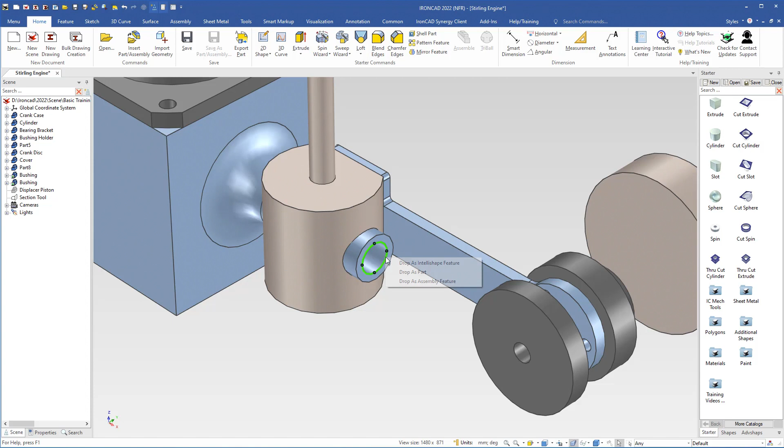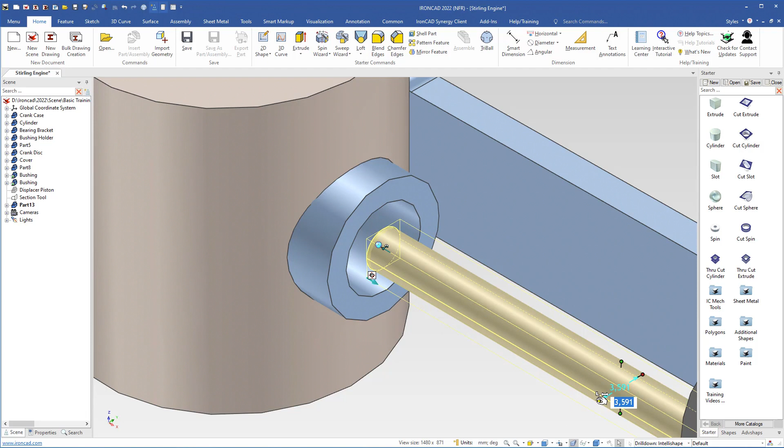But if you don't see the center point, you can move the cursor to the edge, press and hold the Shift key to snap to the edge, and here you let go the right mouse button and you will drop it as a part, and the cylinder will be placed in the center of the hole. But this cylinder is rather large, so I have to change the diameter of it. So I go to the IntelliShape level and I have to change the diameter a lot so that the diameter will be smaller than the hole. I will also change the length a little bit so it will be easier to handle.

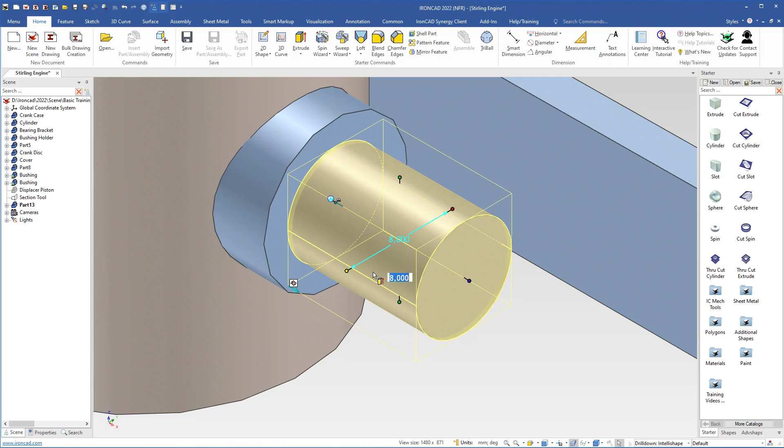So now I will grab this handle and I will move the cursor to this edge, and here I press and hold the Shift key to snap to this edge. And here I let go the left mouse button and then the Shift key. So now I have the right diameter of 8 millimeters. So now I have to change the length a little bit, so I will grab this handle and drag and I will drop it there and type 30 and hit enter.

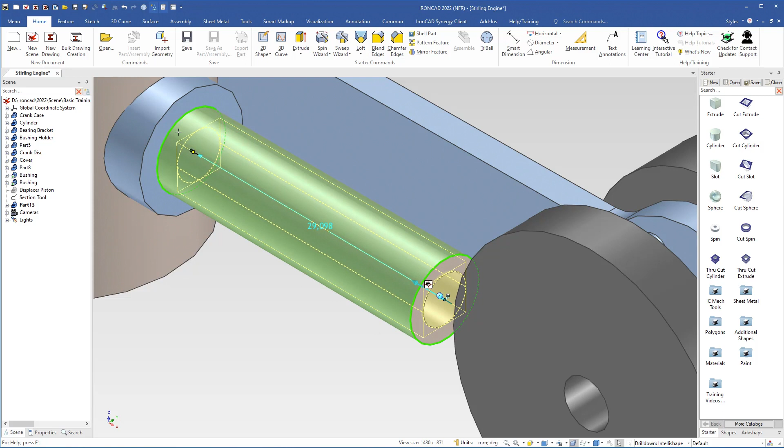Next we will cut a hole through the bushing, so I will use a cut cylinder to do that. Grab a cut cylinder, drop it here in the center and change the diameter to 5, and it should go right through. So I will grab this handle, press the Shift key, hold the Shift key and snap to this edge, and it will go through the bushing.

Then we will place the bushing inside the pipe, so I will select the bushing in IntelliShape level, and here I will right click and choose Flip Extrude Direction, and it will be placed here in the pipe. So then I will select it in part level and go to Properties, and we will change the name here to Piston Rod Bushing. Hit enter, copy the name and paste it in description, and the part number will be 122 and hit enter.

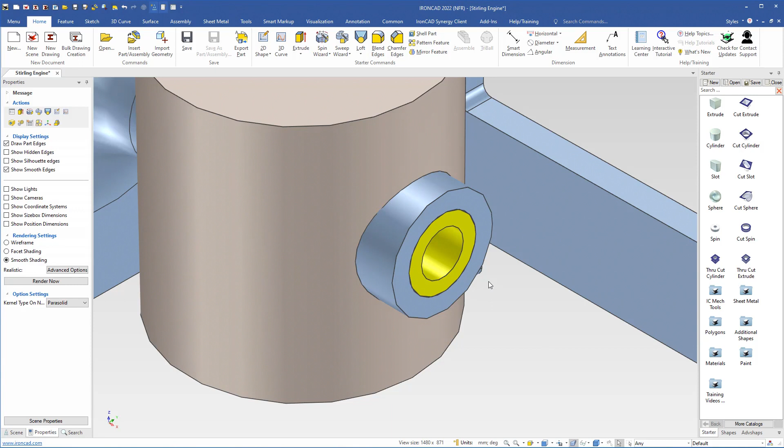Then we come down here to select another color and we will paint it with this yellow color. Then we will bring back the displacer piston, so we use Shift Space to show all. Next step is to make a connecting rod bracket that will be attached to this piston rod. But before we make the bracket, we have to extend the length of this piston rod, so I will select it in IntelliShape level, grab the handle, press the Control key and hold it and snap to 78 millimeters.

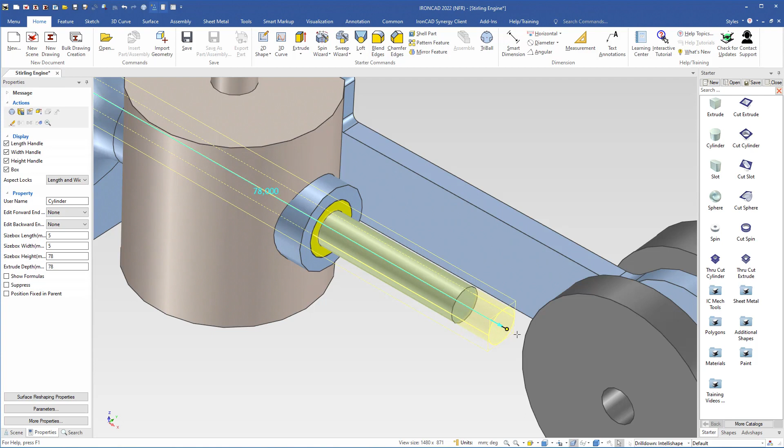Then we will right drag a cylinder and drop it here on the center point, drop it as a part, click OK, and we change the diameter to 12 millimeters. Type 12 and hit enter, and the thickness will be 7 millimeters. Now when we have it in IntelliShape level, we right click and choose Flip Extrude Direction, so it will be in the right location on the piston rod.

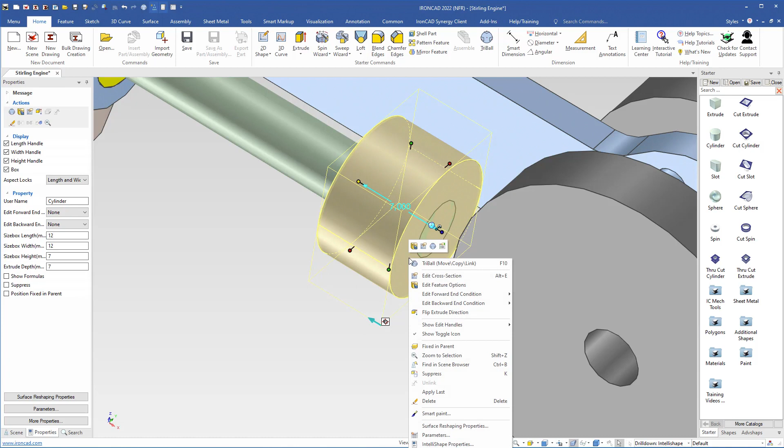And then we have to cut a hole through this bracket, and there are a couple of ways to do it. You can use a cut cylinder to cut a hole, or you can right click this IntelliShape and go to Edit Cross Section. Then you come up here to select the Project command and click on this highlighted face. So now you copy the edges to the grid, and then you can come up here to click Finish and you have cut a hole.

Then we have to remove material from this side so that we eventually can mount a connecting rod to this crank disc. And we will use a cut extrude to remove material. So I will drop the cut extrude here, and I grab this handle, use the Shift key to snap to this node, and I will grab this handle to snap to this node, and I will grab this handle to snap to that node. Let's see now, like so.

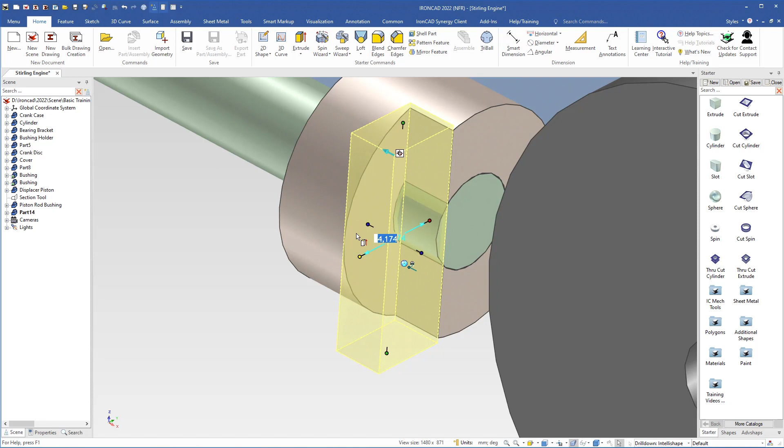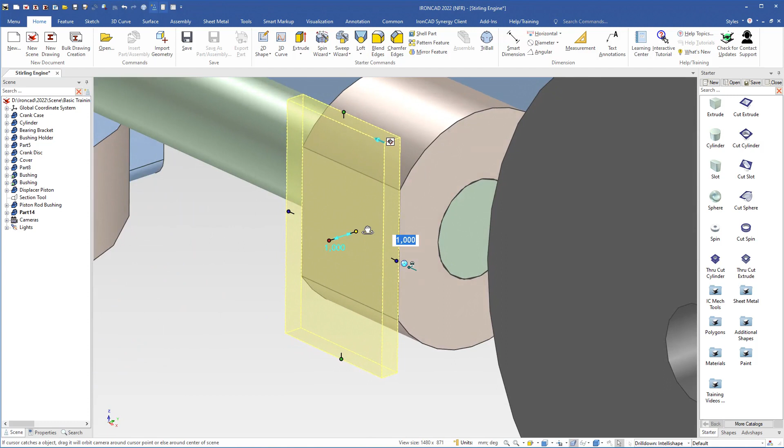And this cut extrude should go right through the bracket, so I will grab this handle, use the Shift key to snap to that edge. Then I'll right click this handle and choose Edit Distance from Center Point of this edge, and it will be 1 millimeter. So that will be enough material to remove to mount a connecting rod.

So now I will select the bracket in part level, go to Properties. Here I will change the name to Connecting Rod Bracket. And hit enter. I copy the name, paste it here in description, and the part number will be 124 and hit enter. And I will paint it with this gray color.

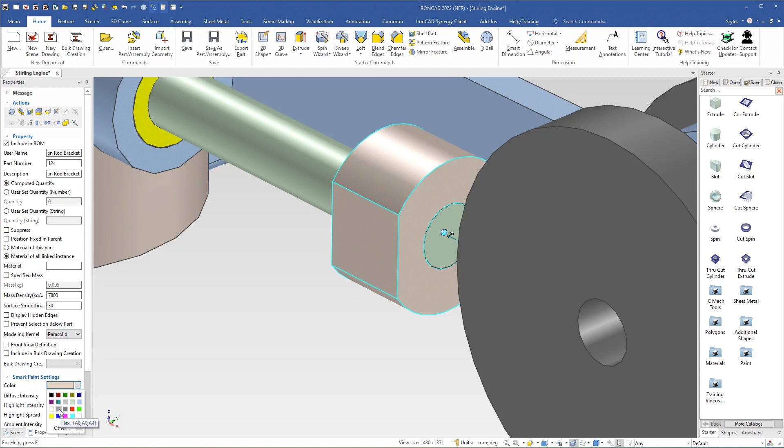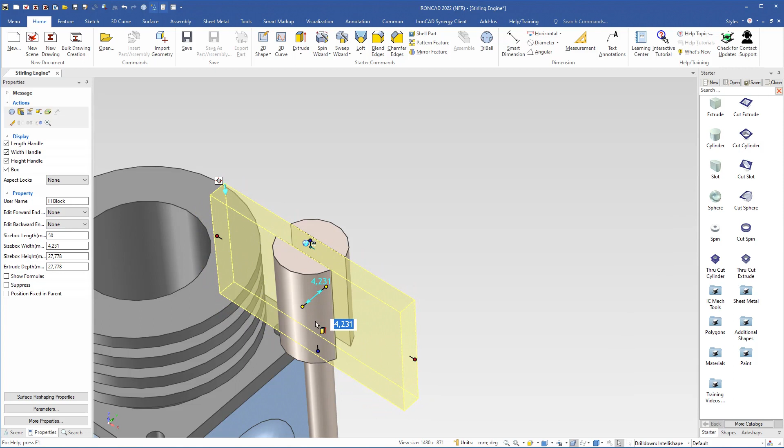So next we will cut a notch here on top of the pillar. So we will use a cut extrude to do that. So I will select the cut extrude, drop it here on the center point, and I will right click and hold this handle so that we change the width symmetrically. And we change it to 4 millimeters. Hit enter. And because we dropped it on the center point, I can also right click here and hold to change the width or the length.

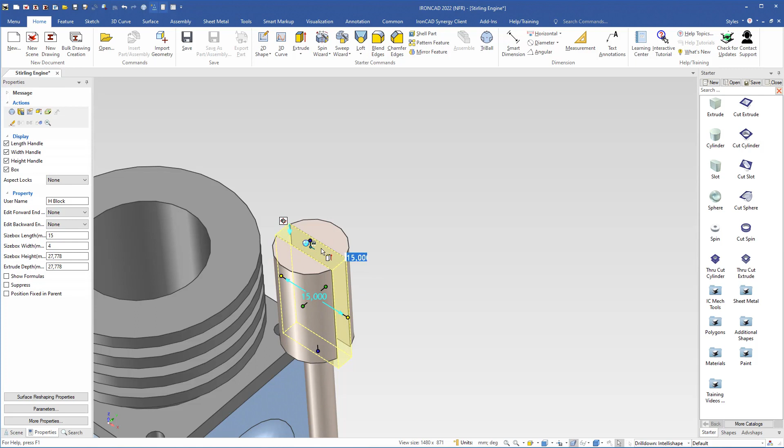So I will drop it there, and then I will right click and hold again, and press the Shift key to snap to this node here. So it will go through the top of the pillar. And the length will be 15. Type 15 and hit enter. So then I go to top front right and fit scene, and we will save this scene, so we will continue in the next video.